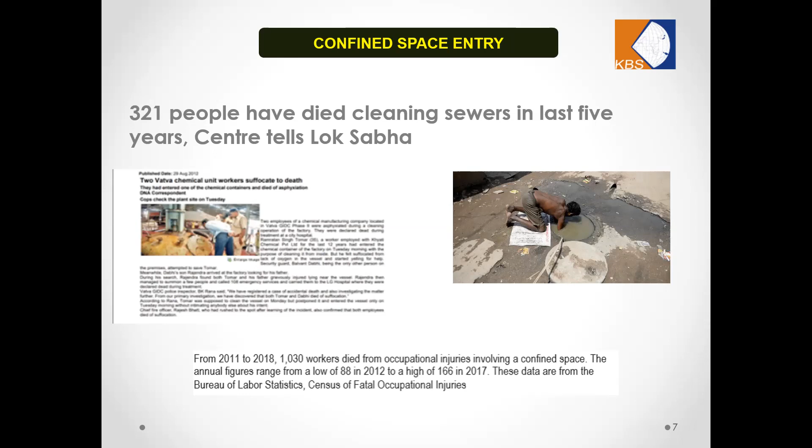Now, as per my experience of industry, one of the biggest hurdles is people do not understand what is a confined space. How do we define a confined space? What is and what is not to be considered as a confined space? Anybody would like to share his idea or point of view on what should be a confined space and what should not be? Anybody? Any volunteer?

Yeah, hi. Thank you very much. This is Murali here. Hi, everybody. Hi.

As far as the confined space is concerned, what we see in the PowerPoint presentation, most of them are from OSHA 1910. But one of the factors we may have to add as mandatory, after the third bullet point, is not designated as a place of work and as a place of regular residence. Many workers consider the confined space a closed enclosure, so they consider it a temporary residence. OSHA regulations very clearly say it should not be used that way.

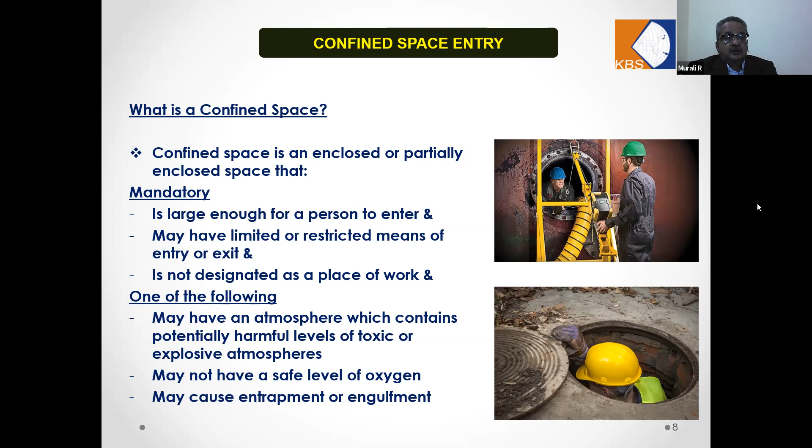I'm talking about OSHA CFR 1910.146. That you may consider adding, please. Definitely. That's a good point.

Right. So, as we see on the screen, a confined space is a space which is enclosed. It could be fully enclosed or partially enclosed. You need to apply the following mandatory points of definition along with any one of the other three mentioned here. So if any space meets these three mandatory criteria and any one of the following non-mandatory points, that place has to be designated and identified as a confined space.

A confined space will be any space which is large enough for a person to enter, at least big enough for a person to completely enter into that space. Along with that, it must have a limited or restricted means of entry or exit, like the one you see in the picture, through a manhole or through small channels, not like the door of your office or your home, where you can simply enter and come out at your will without any problems or obstructions.

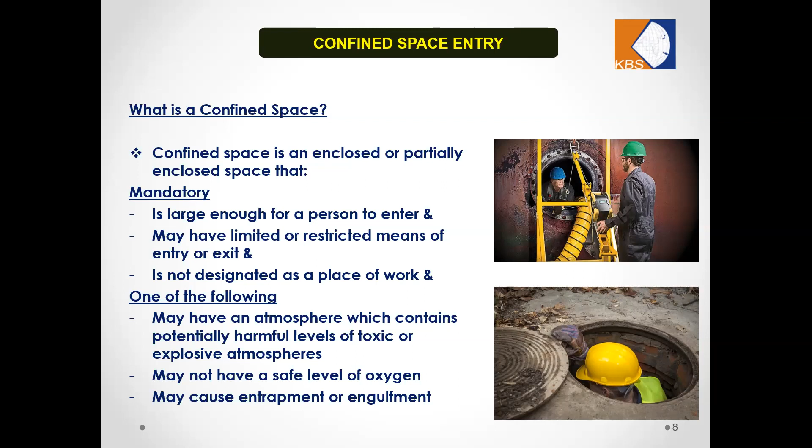Now, what are the major hazards in a... yes, please. I would like to share one more situation which I came across in one of the harbors where the containers are kept to be loaded in the ships. Customs authorities come and open them at random for checks. At that point of time, some workers are working between the containers and some other operators using the forklift or any other heavy lift crane try to lift the containers. Some workers may get trapped between the containers.

It's not only the accident. For example, some group of people are working between the containers in a confined space. Some of them may face injuries and fatalities, but some of them may get entrapped without even scope for them to shout or make a noise because of lack of monitoring, lack of application of regulatory requirements. These things can also happen. Thank you. Yes, they do.

I mean, in ports, I have audited many of the ports. People go in to take samples, especially in those bulk carrying ships like coal or food grains, or people go inside the chambers to collect samples, and they get entrapped due to oxygen deficiency and others. Yes, even the ship cutting recycling facilities in Alang and other areas, where people go inside confined space to cut open the ship and all the vessels and tanks inside the ship. There are a lot of incidents in this industry with respect to confined space.

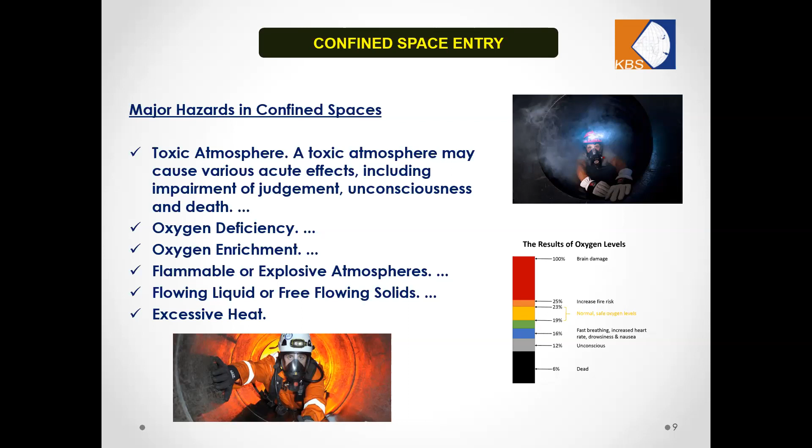Now we have discussed what is a confined space and the major hazards in a confined space. So now let us talk about what should be the controls so that people who have to work in confined spaces can work safely.

The first and foremost mandatory, in fact statutory requirement, is that no work in a confined space should be carried out without applying a formal permit to work system, or a work permit system, whatever you may like to call it.

Every industry which has confined spaces must have a formal work permit system, and every time a person has to enter a confined space or perform a job in one, a formal permit must be obtained with all the steps followed without bypassing any of the permit steps.

Ideally, the best practice I have seen in industry is that you normally have your cold work permit, your hot work permit, and apart from the cold work permit, special permits for high risk activities like confined space, work at height, excavation, and so on.

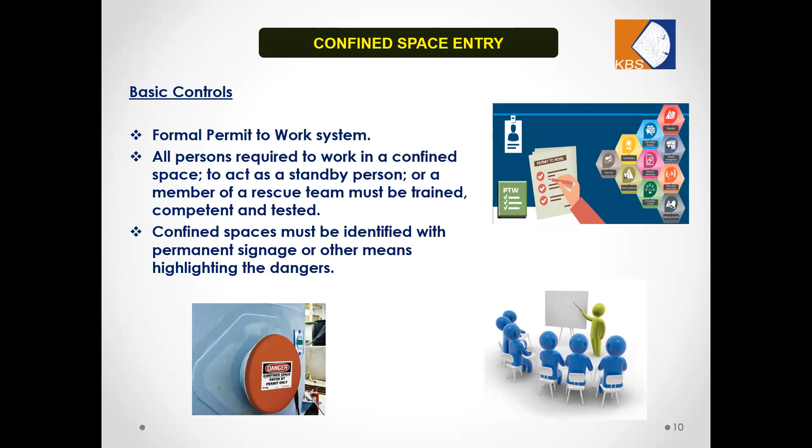Before we enter the confined space or perform the job required, as part of your permit to work system, you must also ensure that all applicable energy sources - it could be electrical energy, steam energy, chemical energy, hydraulic energy, mechanical energy, moving equipment, moving parts of equipment - all these energy sources must be isolated. So you must apply the lockout tagout system, the LOTO system. Once you put the locks and tags, you have to ensure that all the remnant or residual energy is drained out, so that the people, when they go inside the confined space, they don't get exposed.

Many other times I have investigated incidents wherein isolation was performed, but the residual energies were not drained and the people got exposed to acids, alkaline solutions of high pH, hot water, steam, and so on. And they met with fatalities. So we don't want that. So before entering the confined space, lockout, tagout, or isolation is a must.

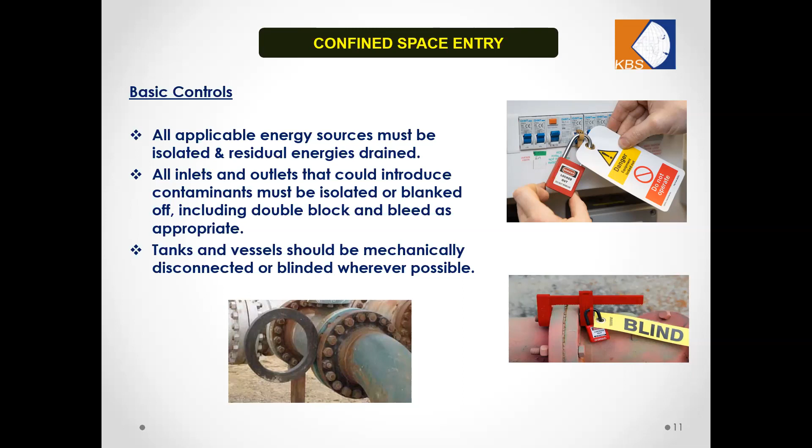Specific safe work procedures must be developed for work activities that are more hazardous when carried out in a confined space. If you are just entering a confined space for a routine inspection or a simple work, it's a different story. But the moment you carry out a more dangerous activity inside a confined space, the risk is higher, exponentially higher.

Like, for example, if you are going to perform hot work inside a confined space, what is the risk or hazards of carrying out hot work in a confined space? What is the additional risk the hot work brings inside a confined space?

Anybody? Good afternoon, sir. Good afternoon. Sir, in hot work, basically in confined space, there may be a chance of fire explosion due to explosive gases. And in this welding work, you can imagine the release of poisonous gas also from that activity. This is the basic thing. Correct. So you may have - yes, please, sir.

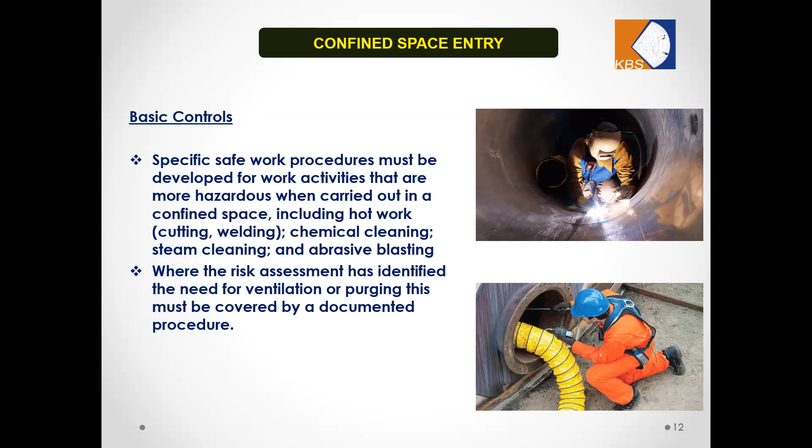So you are required to do initial gas testing and then periodic gas testing as defined in your procedure or as defined by the issuer of the permit. Now, when you're doing gas testing, one of the major mistakes, or I would say blunders, which people make is that they buy a multi gas meter which has a very short probe and they only test the gases at the top of the manhole, near the manhole.

But there are many gases which are heavier than air, like H2S. So when you do the testing at the top portion of the vessel, H2S will show 0 ppm, but at the bottom you have a lot of H2S. And when somebody enters and goes to the bottom, he faints. So ideally, you must have those long tubes or probes, and you must do the testing at 3 areas, top, middle, and bottom, to ensure that the entire confined space is free of toxic gases and explosive mixtures, and has the minimum oxygen level.

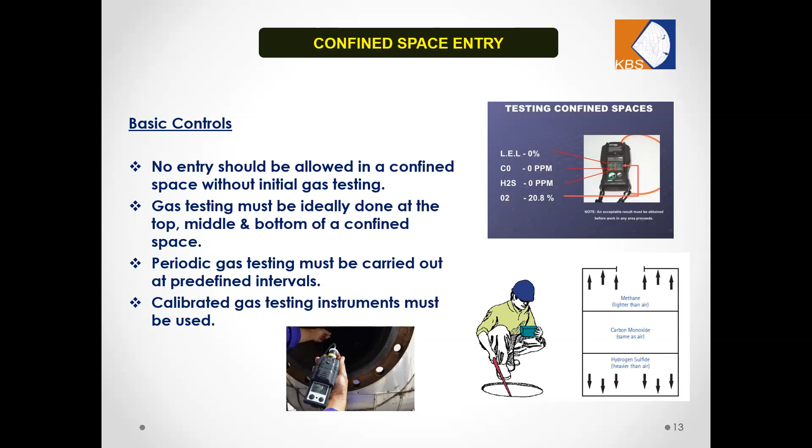All these multi-gas meters, what I have seen, ideally have a calibration frequency of 6 months. So every 6 months, you must calibrate these multi-gas meters. For all confined space entry jobs, the area ideally must be barricaded with proper signage that confined space entry is going on. Right? The permit copy must be available at the place of work.

Whenever the confined space is left empty, as I said, during lunch breaks or tea breaks or for some other issues, please put a soft barricade on the manhole with proper signage as shown in the picture, because it's a human tendency. We are always curious to peep inside a confined space.

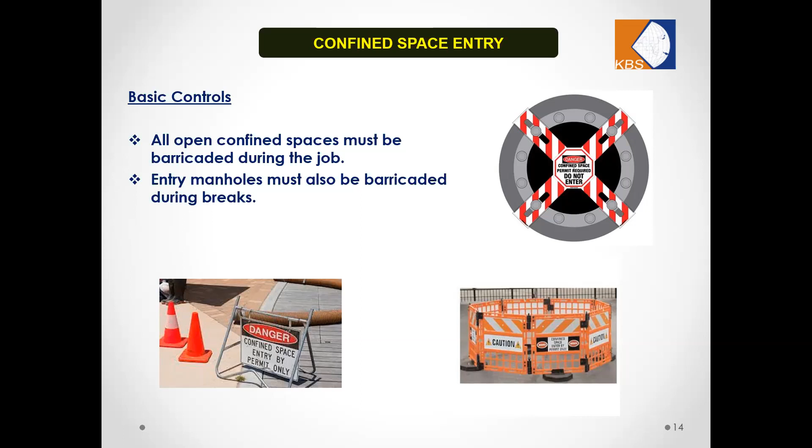For every confined space entry job, you must have a dedicated full-time attendant or standby deployed throughout the job until the time the permit is completed and closed out. And his duty will be to remain outside the confined space. He will not go inside the confined space. He will monitor how many entrants are going in, time in, time out. He will guard the space from trespassers or peepers, as we discussed earlier. And during emergency, he will summon the emergency response team or the rescue team.

Trained rescue team must be deployed with appropriate rescue equipment. So first of all, when you have confined spaces identified in your site, ideally you must have the bare minimum confined space rescue equipment with you, like full body harnesses, ropes, tripods for vertical entry and vertical rescues, stretchers for horizontal entry and rescues, self-contained breathing apparatus, blowers and all those kinds of equipment.

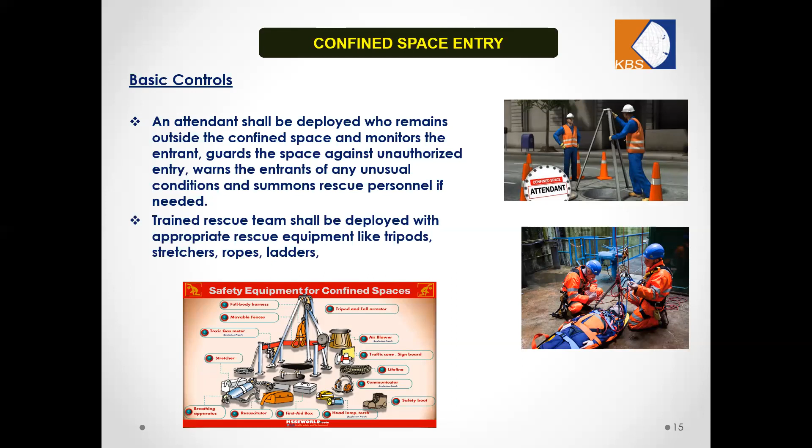So these are all the basic, I would say, hazards and controls required for a safe confined space entry job. Any questions or queries?

Sir, I have one question. In this total topic, we have not discussed illumination inside a confined space, I think. Yeah, maybe I skipped it. That's a very valid input. So poor illumination is also a hazard. So we have to ensure that we have adequate illumination inside the confined space. And if you require to take a portable bulb or illumination equipment inside a confined space, it should not be more than 24 volt DC equipment.

So yes, rightly pointed out, illumination is very, very important. And also we have to make sure the illumination equipment that we bring in is of 24 volt DC or lesser. What about manhole dia, sir? Manhole dia, 16 inch. See, as we said during the definition of confined space, it should be large enough for a person to enter. So if the manhole dia is not big enough for anybody to enter, then it doesn't qualify as a confined space in the first place.